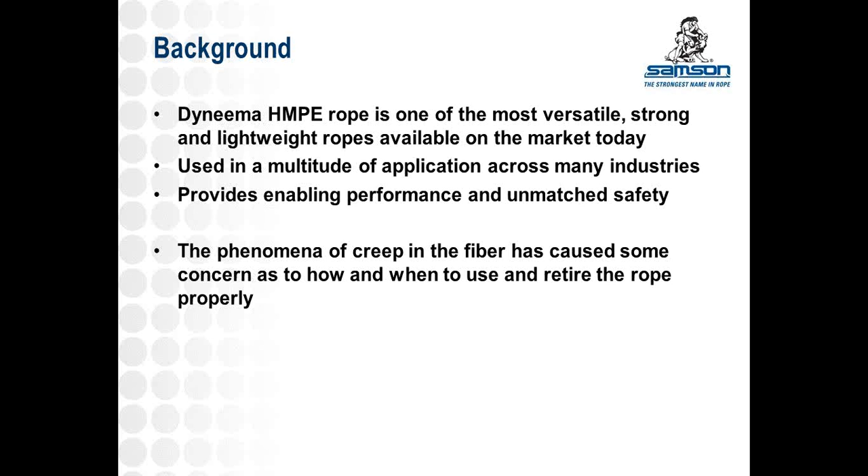Hold on a second. There we go.

First of all, a quick definition. Creep is an intrinsic material phenomena that takes place that is a very, very slow and permanent deformation of a solid material when it's under a stress. So basically, I'm pulling or pushing on something, and it's going to continue to elongate or shear. Creep in other cases is known as cold flow.

One important thing to note is that creep occurs in nearly all materials, all solid materials, to one degree or another. The difference is the mechanism by which that creep takes place can change dramatically between materials, and the rates and the extent to which it happens can change quite a bit. And this is really a material property. It's not so much a rope property. What's actually happening is there's dislocations or sliding taking place between the long molecules that make up the polyethylene polymer or macromolecule. So in the case of an HMPE creep, what you have are these chains sliding past each other.

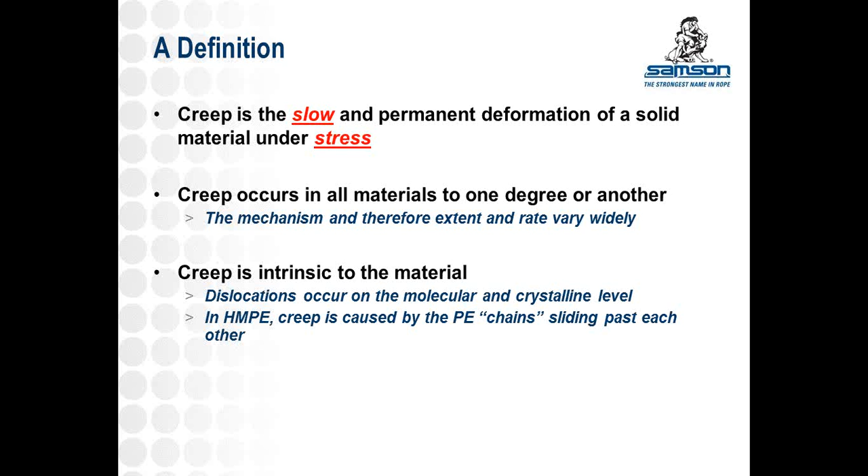To give it a quick analogy, if you imagine that individual polyethylene molecules look like long pieces of cooked spaghetti. If you were to take a block of just high modulus polyethylene, I'm not talking about the fiber right now, but just a block of HDPE, what you'd essentially see on the microscopic level is a tangle of these polyethylene chains. Now, what happens when you draw the material to make a fiber is these chains tend to line up, similar to when I'm lifting my spaghetti out with a fork. I'm pulling on it, and because I'm pulling on these chains, they tend to slide a little bit and line up. This is what imparts great strength to the Dyneema fiber.

However, those individual molecules aren't very, very well fixed to each other. They're not what we call cross-linked. And so they're still capable of having movement relative to each other. And that's generally what's happening when the fiber is creeping. Under load, there's always a chance that one of those little molecules, not even a fiber, it's a molecule, can slip past its neighbor just a little bit. So similarly, if I'm lifting my fork up out of the bowl of spaghetti, those spaghetti strands are sliding past each other a little bit, up until the point when eventually they slide so far past each other that it disconnects, it breaks. I can put the fork full of spaghetti into my mouth and leave the rest in the bowl.

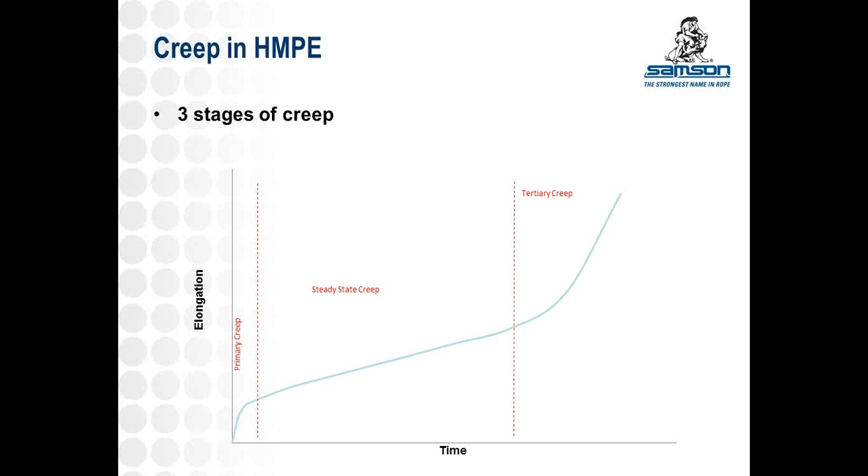Finally, as you approach the end of that steady state creep, you hit the tertiary region. This is where the creep begins to accelerate. This is essentially akin to where those strands of spaghetti start disconnecting from each other. Now you have fewer and fewer bits holding together, and so the creep rate begins to dramatically increase and failure is imminent. So generally when we talk about the time to retire due to creep, it would be at the end of the second phase. You wouldn't ever want to go into the third phase. That's considered being in the danger zone.

So to break it down in a little bit more detail, this primary creep, this is that rapid elongation. And what you really have taking place here is not so much the polymer chains sliding past each other yet, but rather there's a slight reorientation of what we call the amorphous zones. So most of the fiber, most of the material that makes up the rope is what we call crystalline or pseudo-crystalline. The molecules have very specific locations next to each other. They're basically all standing in line. You do, however, have small regions where a tangle still exists, where they're not all standing in line nicely. They're still kind of mixed up like the spaghetti in the bottom of the bowl.

So when you first load it up over that first days to weeks, sometimes hours at a high enough temperature, what you see is those amorphous zones kind of straighten out and elongate. And this takes place, like I said, pretty quickly relative to the steady state creep, but it does quickly peter out. Important to note is this is often the quote-unquote creep that's observed by a user in the field.

So if you were to take a piece of Amsteel Blue, using it as a halyard, and you were to tension that halyard, and a short while later it seemed to have slacked off or lost tension, people go, oh my God, it's creeping. And they expect that that rate of creep would continue. It will not. Basically, that portion of it might be a percentage of strain or a percentage of elongation before it stops growing, slows down and really hits that slow zone, which is orders of magnitude slower than this rapid part in the beginning.

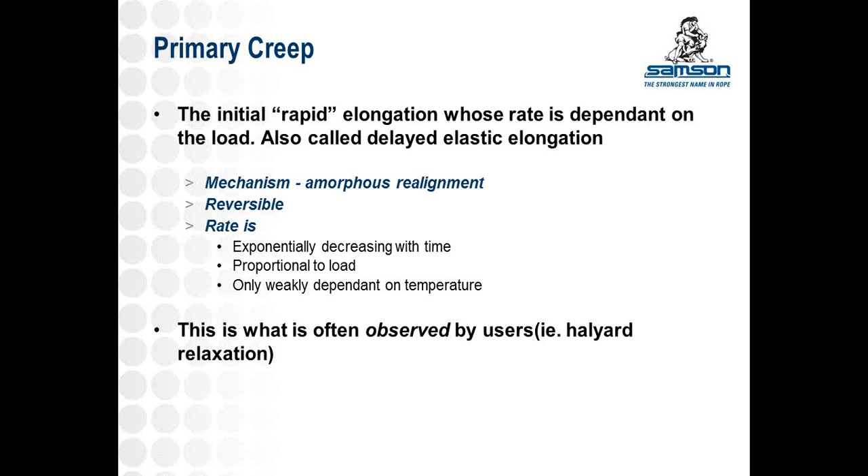Now that slow zone is this secondary creep. This is really where those polymer chains, which are already standing in rows next to each other, nicely in line, begin to slide past their neighbors. And this rate, assuming that the temperature and the load are the same, is going to be constant over time. And like I said, it's going to be anywhere from 10, 100, 1,000 times slower than that first initial bit. This secondary creep is really mainly of a concern to applications where there's a long-term steady load, or there is a high temperature, or a combination of both.

The truth is, for most applications, for example, if you're using it as a main line on a tugboat, you're never, ever, ever going to see significant creep; it's just not loaded long enough. You're going to have failure due to other mechanisms. But let's say you're going to have a mooring tether for a floating offshore oil platform that's got an operational life of 10 years and a design life of 50 years. Then yes, you would observe significant amounts of creep.

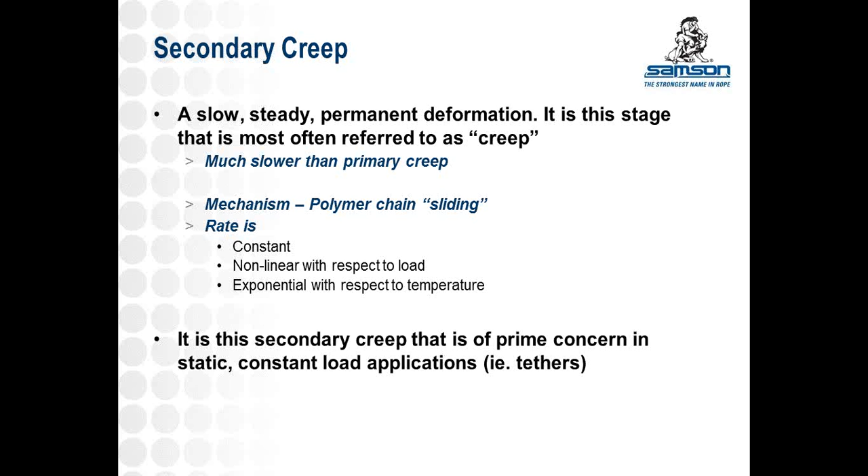And finally, as you hit that tertiary stage, this is where, as I said, the creep rate begins to pick up. And really the point of failure is oftentimes hard to predict. It can happen kind of randomly within that tertiary zone. So generally we say that once you've reached the onset of that tertiary zone, it's done. It's end of service life.

And this tertiary phase can begin anywhere between 10 and 30% of elongation due to creep. Therefore, the safest thing to say is if the rope has gotten 10% longer than it was when it started, it's done. It's good to say you can put this away. Like I said, when this onset takes place depends on the temperature and load history. It's impossible to have one number that covers all scenarios. It's a quite complex nonlinear phenomenon.

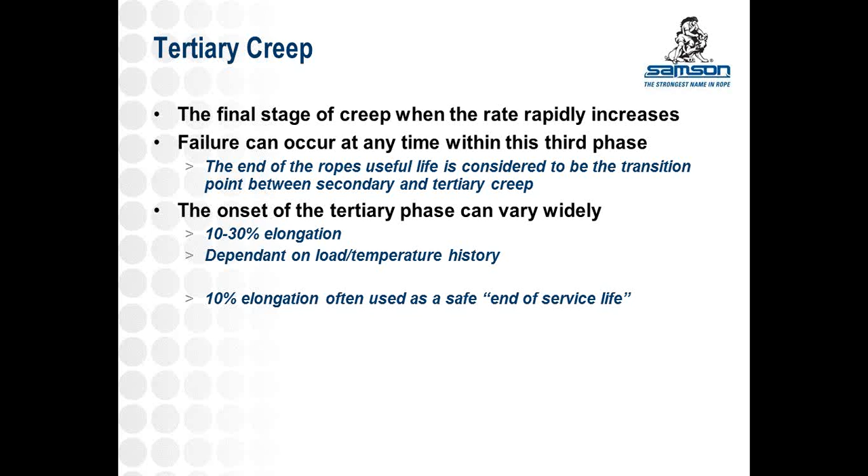Now, we generally don't think of a Dyneema rope as being very stretchy, as opposed to a rubber band, but essentially they are behaving in the same way. It's just a much, much, much stiffer rubber band. And this is primarily caused by the elasticity of the material. It's a material property, as well as there is some of this constructional deformation of the rope. So the geometry of the strands of the fibers of the rope changing as you pull on it, it tends to compact and get narrower, and you release it, it wants to move back out a little bit again.

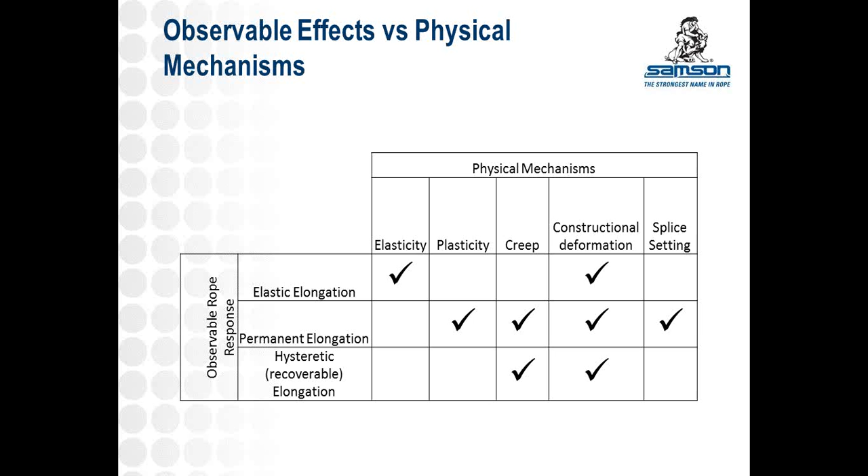Wrong direction. So what are the implications of this? There's really two reasons why creep may be an issue to a user. The first thing that comes to mind for most people is, is it going to rupture? Is my rope going to break due to the creep phenomena taking place in my fiber? And the truth is that really, for most cases that we see users using our rope, that's not going to happen. It requires long times, high temperatures, or high loads. As I said, it's really a concern in these static applications where there's an installation put in place that is going to remain under load for large periods of time, or it's at a high temperature.

If there is any scenario like that you encounter with a customer or potential customer, and you need some advice as to what is the expected lifetime or the creep lifetime, we can certainly do those calculations, and you can get in touch with us, and working together with DSM Dyneema, we can get a pretty accurate model along with uncertainties and tolerances in terms of how long you can expect that rope to last under a certain load.

But as I said, in most dynamic applications, there's other causes of failure going to dominate, whether it's abrasive wear, whether it's cutting, whether it's overloading or shocking. That is really the case.

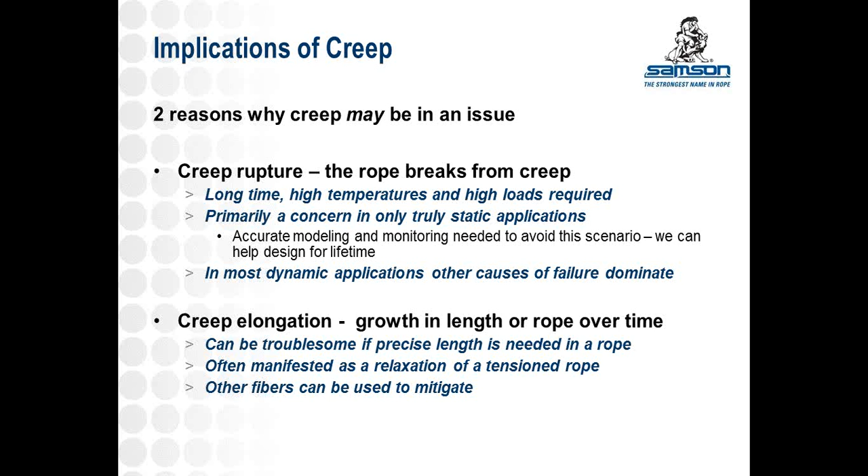So, what can we do about this if we say we want to use Dyneema? Dyneema is the best fiber to use for our particular application, but we may have a concern with creep. What are our choices? Well, SK75 fiber is kind of the performance standard. This is the fiber that we use in Amsteel Blue. And like I said, it's an excellent choice for all-around use for dynamic applications where creep's really not going to be the primary cause of failure.

If there is a scenario where creep is of a concern, DSM has a second fiber that's called SK78, and this is their reduced creep fiber. They've modified the production process slightly, and it reduces the creep rate to about 25 or 50% of the SK75 creep rate, while maintaining every other favorable property that you find in Dyneema: the strength, the light weight, the toughness, abrasion resistance, etc. So this is a good choice for applications where it's a bit of a concern, we want to address it, and we can significantly slow down that creep rate and increase the lifetime.

Finally, DSM Dyneema has just released a brand new fiber, which they call DM20, which is their ultra-low creep fiber. Now this is a complete change. They actually changed some of the chemistry in the fiber as well as the production process, and this has led to creep performance on par with fibers such as the aramids. So it is going to have a negligible amount of creep strain over its lifetime. That doesn't mean it won't have a creep failure. It will. It'll last much, much longer than SK75 or SK78, and it won't be stretching in that time. But like I said, it will happen to everything.

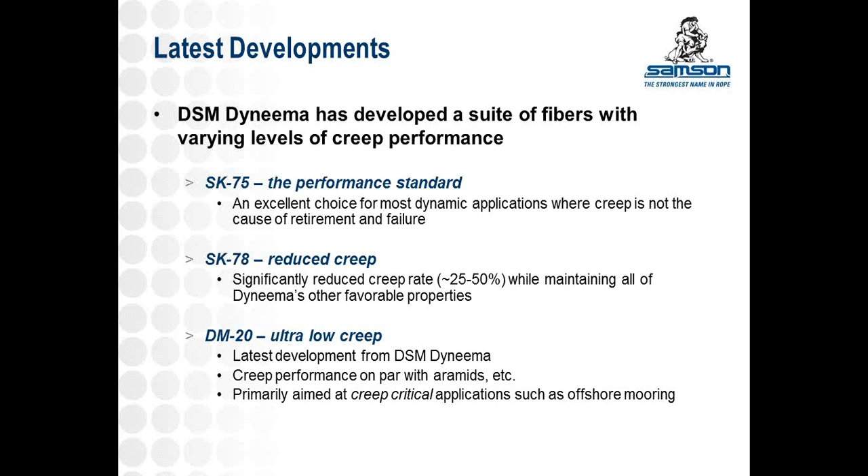But so far, this fiber is brand new. It's primarily being aimed right now at creep critical applications such as offshore mooring. So we don't anticipate at this point to start selling Amsteel Blue made of DM20 quite yet. But we are investigating markets for that fiber.